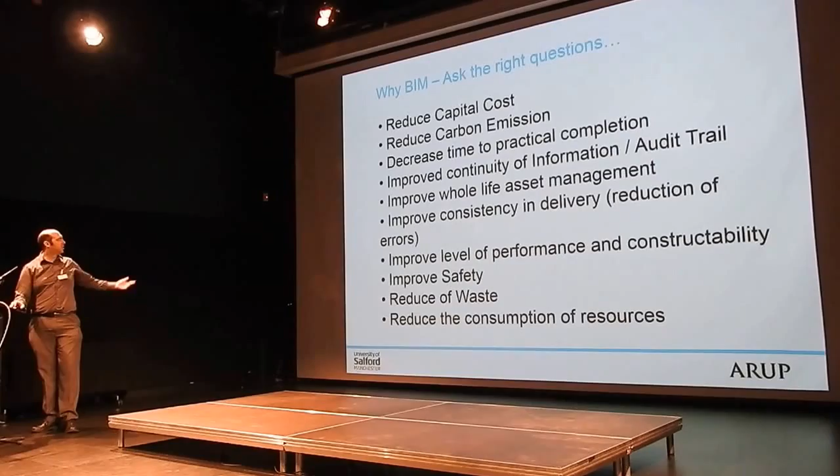So two of the things that are quite key to me, and to most people whether or not they know it, are reduction of waste and reducing the consumption of resources. And the reason for that is this photograph.

This is the most iconic photograph I think ever taken by a human being, although it's interesting that it was taken last century, not this century. This is Earthrise from Apollo, and I'm the second speaker to mention Apollo today. But look at it - wow, one blue marble floating through space, that's our life support system.

Yet we consume resources at an incredible rate, way beyond what the Earth can actually sustain, and we continue to do so. That's going to come back to bite us, and that could be a potential black swan that arises within the next century.

So yeah, we continue consuming resources, we're going to treble the current consumption of resource. And there's a lot of waste, and that's the thing that really annoys me - that in the construction industry there's a phenomenal amount of waste generated.

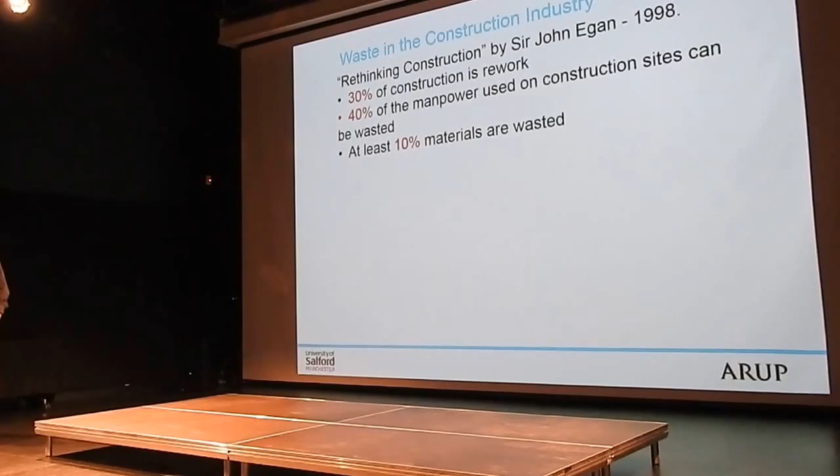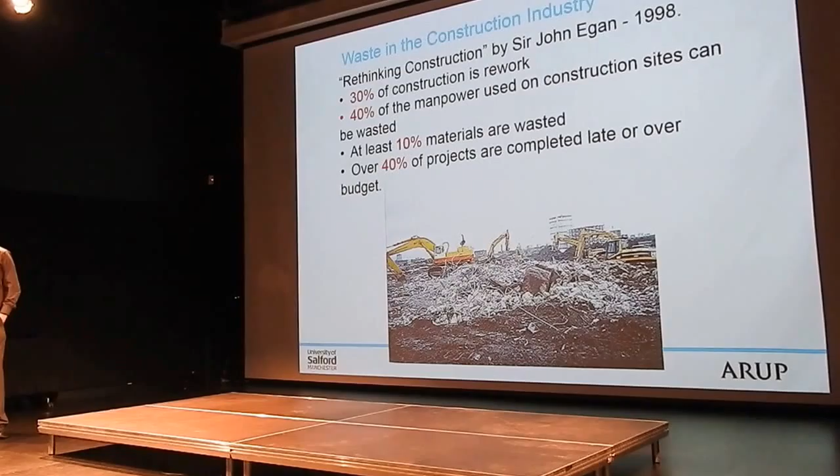Going back, John Egan almost 20 years ago wrote the report 'Rethinking Construction,' talking about 30% construction rework, 40% manpower wasted, 10% of materials, 40% late or over budget. In 2009, there was a report called the Wolstenholme Report, 'Never Waste a Good Crisis,' and that said things haven't really changed, to be honest, except for the projects that took on board lean principles from rethinking construction excellence, where there had been a dramatic improvement. But for the most part, things in the construction industry haven't changed.

NIST wrote a report called 'Cost of Inadequate Interoperability in the US Capital Facilities.' Bit of a mouthful, but they reckon $15.8 billion are wasted every year just through people duplicating the same task again and again between different projects.

Usually in an audience, when I'm talking and I've got architects in an audience - are there any architects in the audience actually? One or two, right? So the classic example is, how many times do you draw the structural engineer's columns in your drawings? And the response is, yeah, pretty much most of the time. Actually, it's duplication. That's just a classic example of duplication, and it happens all the way through the industry and all the way through the different processes.

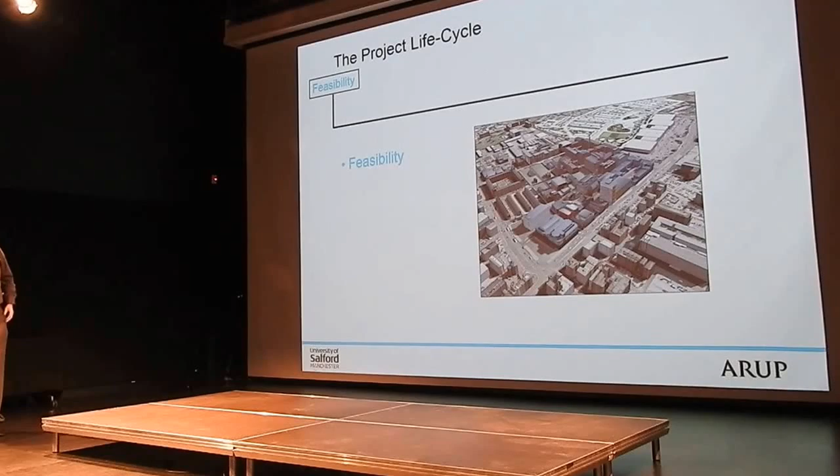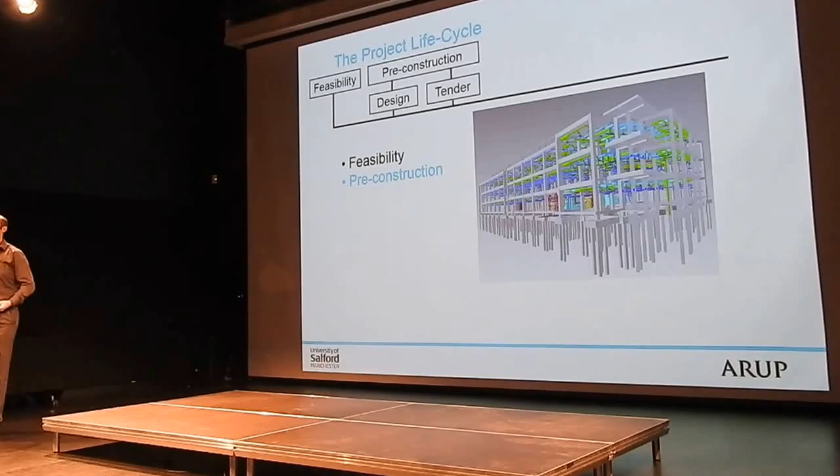So we look at a project life cycle - Freudian slip there - they all go through the same cycles. It doesn't matter whether it's a building or an infrastructure project. You go through feasibility, pre-construction, construction, operation, decommission. Now the interesting thing for the construction industry, as a rule, which is different from most other manufacturing industries, is that we tend to go through a massive redesign exercise after we've tendered the design and when we bring on the construction team.

Because at that point we've actually got the people on board who are actually going to build the thing, fabricate and decide, and they want to do it in a particular way that suits their process. So there's a phenomenal amount of rebuild and rework just built into the procedures. One of the biggest barriers for BIM and for the construction industry isn't to do with technology, it's actually to do with procurement routes. It's about getting the right people at the right time to ask the right questions with the right information.

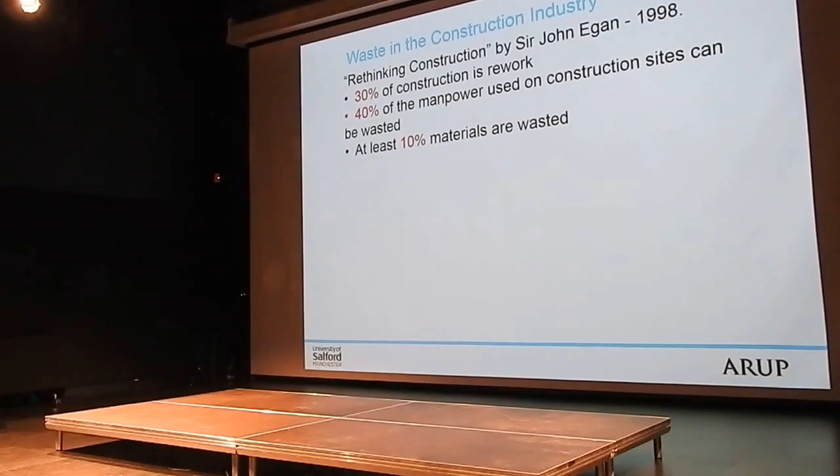Going forward. For some reason. It was so important I did it twice.

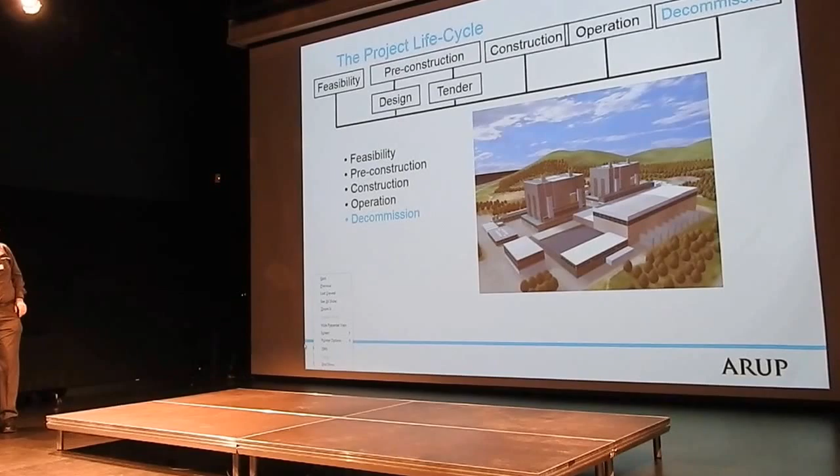Okay, this is the problem, right? Construction industry is... what is going on with that? Oh, construction industry is fragmented. The construction industry is fragmented, and therefore the information transfer between the different groups is broken, and we call this data atrophy.

Data literally dies, information dies as it goes through the process. We start concept, we finish concept, we start again for design. We only ever hand over 50% of the information from design that's in our heads as designers onto the guys who are actually going to build it. They then pass over less than half of that information to the guys actually going to operate the building for the rest of its lifetime.

And typically that used to be in the format of lever arch files, whose only purpose in life was to prop open a door on a hot day. Now we give them a DVD. Unfortunately a DVD is even less useful than a lever arch file because you can't prop open a door with a DVD. So there's something broken in the way in which we perceive and transfer information as we go through the process.

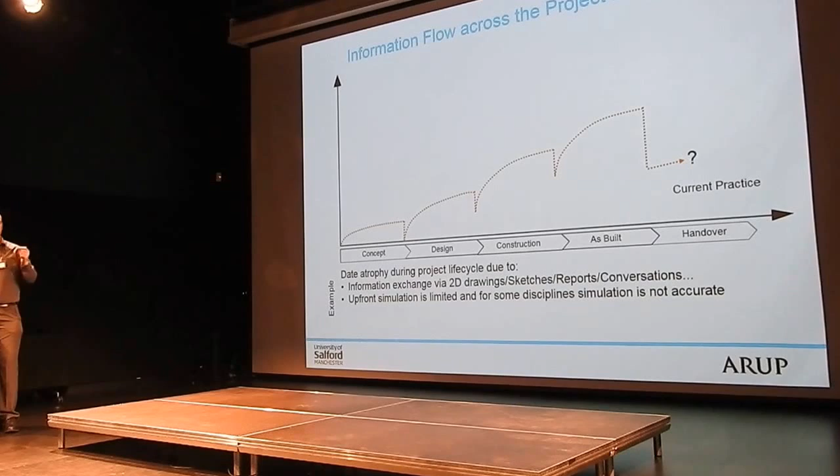There's a whole reason for this, about the way we transfer information, about the way we create information, about the way we don't invest in simulations compared to the automotive industry, which only do a crash test now almost like a final tick in the box. They know exactly how that crash test is going to perform for the safety standards because they've got enough knowledge on simulation. And then we start this final production phase before the design's even complete.

So this is one of the results of this. We have a major amount of resource invested somewhere between detailed design and construction, where actually we can't make as much change, we can not influence change, and it costs a lot of money to change.

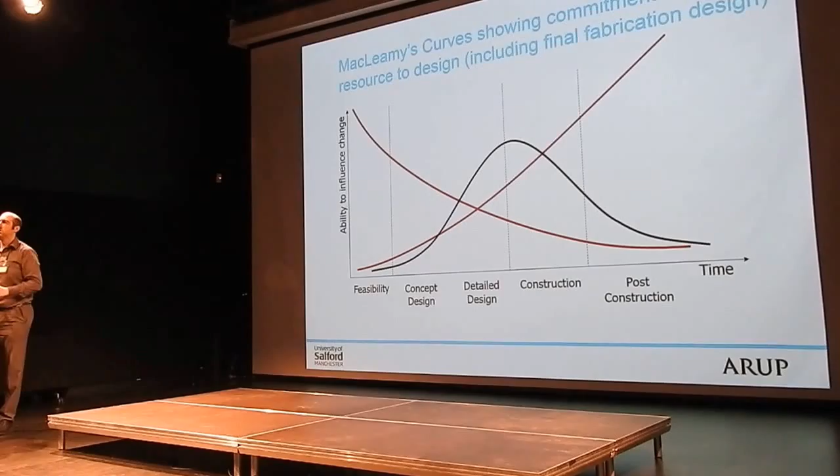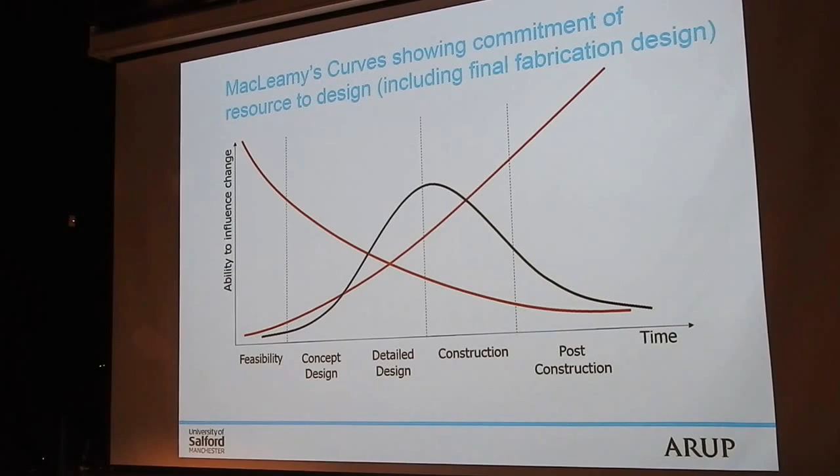Again, if you're doing a tunnel alignment for a Crossrail, for example, at the design stage, if you need to move that tunnel a couple of meters to the left or a couple of meters to the right, they're easy to do—a couple of mouse clicks and it's done at the concept level. You get through to construction, you can't do that. You're locked into it. So we've got to move where we have the resource allocated further to the left, where they can have the greatest influence and it costs the least to change.

And if you notice, actually, what's happened at the bottom of that screen, I've started using different language to do that. I started, again, taking from Derek's presentation, using a manufacturing mindset. I'm talking about concurrent fabrication and design for manufacturing, and then the final process isn't becoming a construction process, it's becoming an assembly process. And this is where we need to get to.

So the answer is BIM. Great, fantastic, we know that. So what is BIM? Well, BIM is a really interesting thing, especially when I'm talking to an infrastructure audience, because everybody says, well, BIM, it's building information modeling, it's not relevant to infrastructure, is it?

Let's get rid of 'building.' Let's not think about a building as a noun, let's think about building as a verb, let's think about the built environment. What we're actually talking about is assets, assets within the built environment. So let's look at the other end: modeling.

The problem with modeling is most people, helped by a lot of software vendors, think about modeling as being something that is a three-dimensional model. It is a model. But actually, stop thinking about it as being a three-dimensional CAD model, and start thinking of it like a scientific model or a financial model—a way of understanding how something behaves.

And actually, let's not even think about modeling. What we're talking about is management—the management of information. So if we had our time again, we wouldn't be calling it BIM, we'd be calling it Asset Information Management, which, considering there's only three words in the acronym, we managed to get two of them wrong.

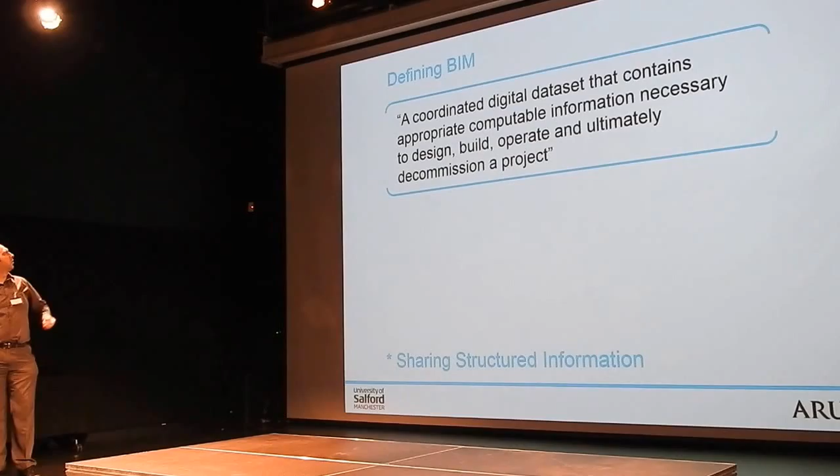If you look at the definition of BIM, a coordinated digital data set that contains computable information necessary to design, build, operate, and ultimately decommission a project, or what PAS 1192 talks about, a process of designing, constructing, or operating a building or infrastructure asset using electronic object-oriented information, we're talking about process.

We're talking about sharing structured information. And if you take one thing from this for the rest of the day, BIM is about sharing structured information. It's not enough just to share information, but you've got to structure that information in a way that somebody else can use for doing their process, and therefore eliminate duplication.

So BIM is like a subset, or coming together, of geometric and technical simulations. Geometric simulations are absolutely fundamental, we'll never get away from that. We're 3-dimensional creatures living in a 3-dimensional world, we need geometric prototypes. But it's also about project information and about ICT, being able to communicate the information, being able to store it.

Know with confidence that when you get that information, you've got the latest information and you're making decisions based on the most up-to-date information. This is what BIM is, bringing all of these things together, making sure that the right people can make the right decisions at the right time with the right information.

So, I usually ask this question just to reinforce a point. Basically, on what I've said so far, should you think that A, BIM is a process that conforms, enhances and strengthens your current businesses by facilitating greater efficiency, or B, a software that you choose to impose on your current business because everyone else is using it?

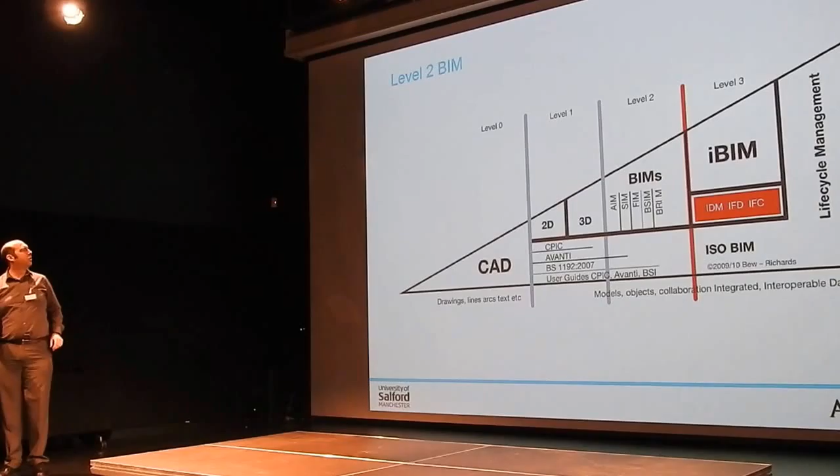It's not the software, and you've seen the Bew diagram. What's interesting about level 2 BIM, which is where we should be going for October this year, is it's preceded by these other levels, level 0 and level 1. So level 1 BIM is basically 2D CAD, but it's 2D CAD done in a particular way.

It's still about sharing structured information, and one of the primary documents for this is BS 1192. BS 1192 gives you information about how to structure information from CAD, talking about layering, talking about naming conventions. And that's really important. You can't move on to level 2 before we've actually understood the basics of sharing information, how you provide layers between different companies so people can actually use the same information without duplicating.

And then we go on to level 2. So level 2, there's 8 documents, or 8 pillars, we call them, of BIM. The first 4 are extensions of that first document, 1192. Some of them are PAS standards, one of them is actually a real British standard, and they deliver information on capital facilities, the delivery, information management for the operational phase, information exchange requirements.

Which is how to structure COBie, how to deal with the security of information. So they're all documents that help you with sharing and structuring information for the purpose of sharing that information with others.

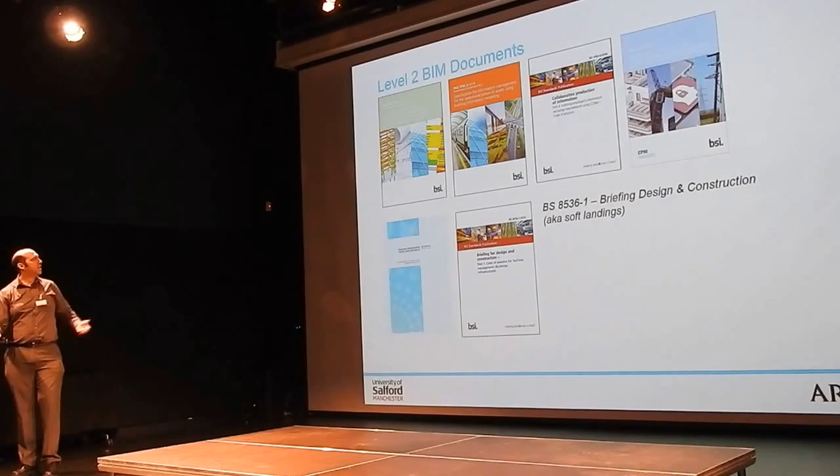That's a really important lead in moving forward on how we think about working together and collaborating. There's another document about soft landings, about briefing. Then we've got a classification system, for example, Uniclass 2015. And recently we've got the digital plan of works. All of those documents together, that is BIM Level 2. And that is where we should be in the process of understanding all of these for the delivery of government centrally procured projects by October of this year.

And then you look at that and you think, actually, the industry's got quite a long way to go in a couple of months. This is potentially black swan moments, moments where people find that actually they're no longer able to bid on centrally procured projects because they're not able to demonstrate that they can work in a BIM-enabled way. And there's a long way to go.

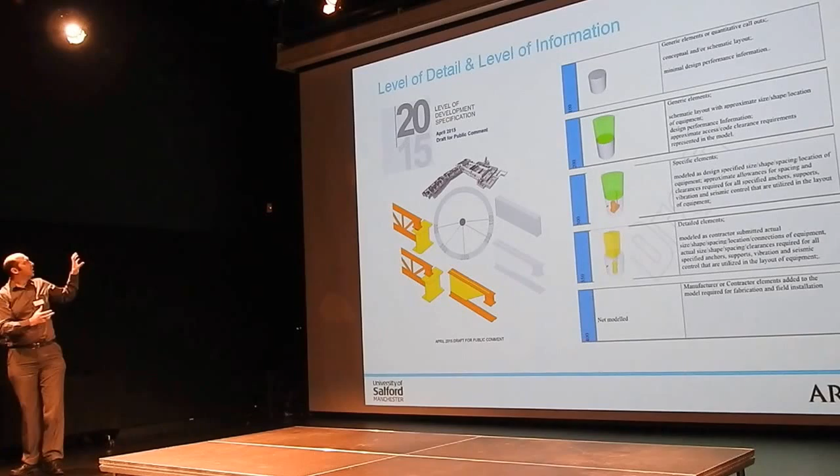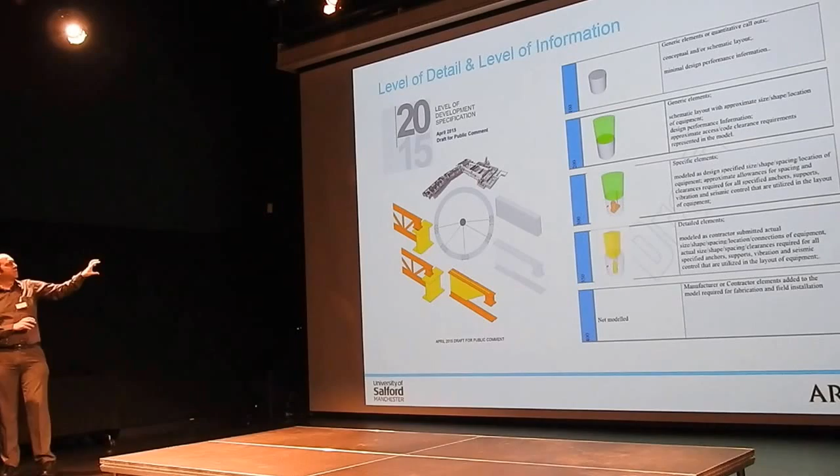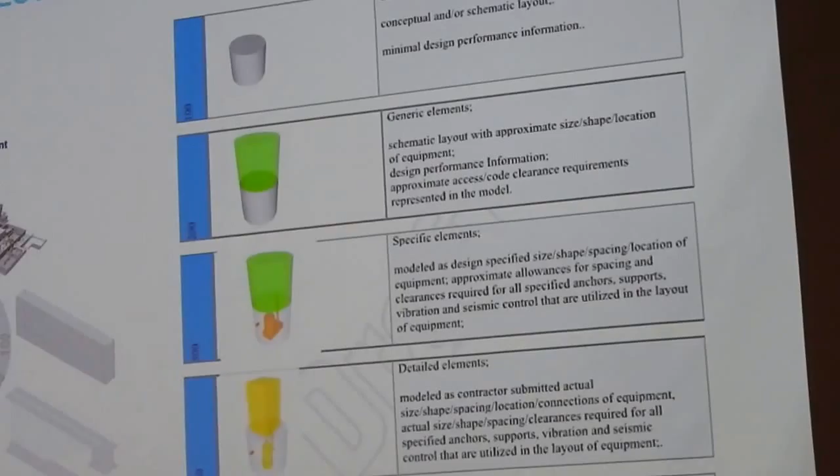Just before I talk about a real project, the last thing I want to talk about is this idea of level of detail and level of information, because this is another important thing within the framework of BIM objects. Level of information and level of detail is being handled by this digital plan of works. Now, level of detail for building projects is actually quite well defined, and we use an American Institute of Architects document, the AIA document. For infrastructure projects, there is not that body of work out there about helping define at which stage and how developed objects should be for an infrastructure project. So there's quite a bit of work to do on developing the same level of granularity and making sure that people can understand.

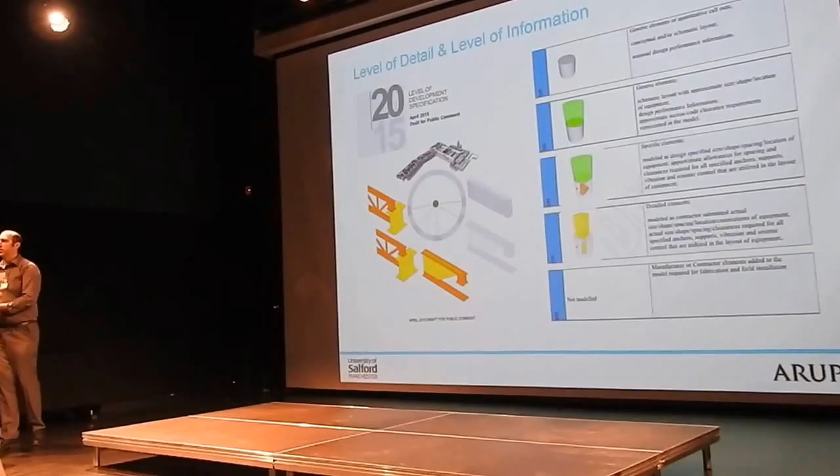And eventually this comes back to scope of works. It comes back to what are you being contracted to deliver at a particular point for the client in terms of the structure of information.

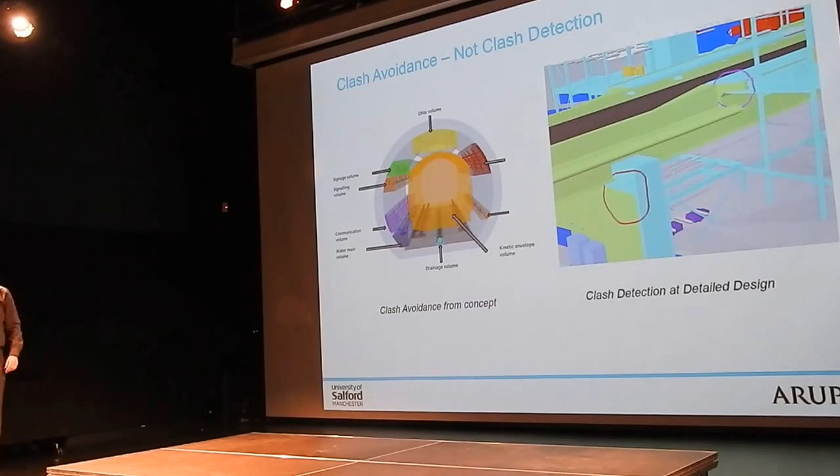Eventually, hopefully, the idea is that we're going to move from this idea of clash detection. Everybody talks about clash detection, but actually the key we should be talking about is clash avoidance. So this is an example, taken out of PAS 1192. We talk about, right at the start, in terms of concept, about volumes, making sure that there's volumes in models. If you're a package designer working within the overhead line electrification volumes, and you stray out of that package, you know there's potential that there's going to be a clash somewhere. Stay within that for your package, and you know there's a chance you're not going to end up later in the detailed design doing clash detection and finding clashes. So we need to get into the mindset of trying to avoid clashes as we go through the project, right from the start all the way through.

So I'm very quickly just going to talk about a real project now, which is Crossrail, a project that Arup was involved with, on multiple sides. We also had staff seconded into Crossrail to help set up the information management.

Crossrail is an amazing project, a massive tunnelling project through London: 28 surface station upgrades, 8 major subsurface stations, 90 kilometres of network, 21 kilometres of twin-bore tunnels. A massive project. And it's been a success largely through the adoption of information management processes to help manage the amount of detail that we've got to do.

The purpose of Crossrail was to increase London's below-surface rail capacity by 10%, provide massive, significant regeneration opportunities along its route, act as a catalyst for growth, and provide high-capacity links from Heathrow to London's West End, Canary Wharf and the east of London.

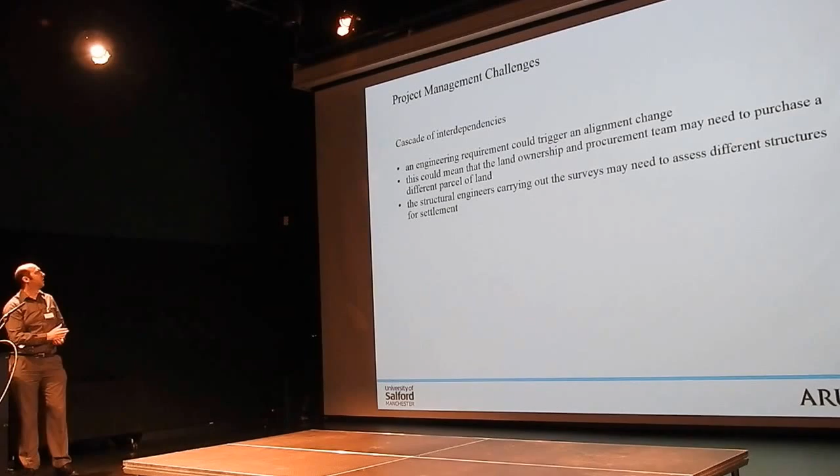But what did it actually mean in terms of the cascade of project management? Think about this example. An engineering requirement triggers an alignment change of the tunnel alignment. This then means the land ownership changes, the requirements for understanding the land ownership for that tunnel changes as a result. You may need to buy a different parcel of land. It means structural engineers then have to go and survey all the new buildings on that alignment, and transport and logistics teams need to find different accesses to that site. And that's just triggered by that alignment change.

So in order to do this, we've got to bring together lots of different things: computer-aided design, BIM-enabled tool sets, BIM authoring packages, GIS systems, geographical information systems, and project information management — and it looks something like that on the right. We've got all of these different people contributing information, taking information, contributing information all the time over this massive infrastructure project.

So what we want to do is move towards the creation of virtual assets. This is a different mindset moving forward with BIM. Clients need to think about procuring digital assets, not just physical assets anymore. They're going to procure digital assets.

We've got to set some processes, integrate all the design, construction and operational life cycles within this virtual environment, and collaborate between all the different parties. Ultimately what we want to get to is this concept of a single source of the truth, which has got all of the information so people can make the right decisions at the right time with the right information.

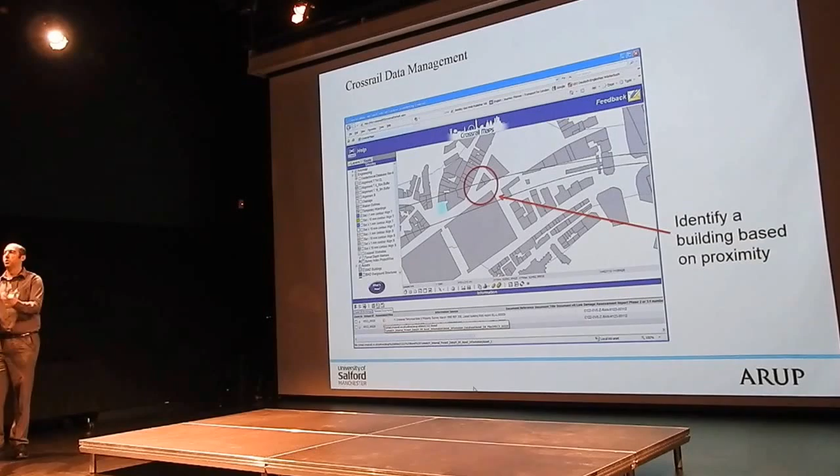Remember when I was talking before about changing the alignment - these dark lines you see on the graph represent the tunnel lines and settlement lines, and we've identified there is a building within that. Using the GIS system, we're able to pull out information about that building - photographic information, who owns it, any surveys or ownership correspondence. Everything related to that building can be pulled up from this database by cross-referencing using the GIS system.

It's basically just a means of accessing data so people can make decisions with the right information. This used a browser, so it wasn't a bespoke piece of software. It was designed to run within a browser, so you didn't need to install anything on your computer - you could just use a browser to access this information.

The types of tools integrated into Crossrail included 2D and 3D CAD, GIS, visualizations, data management, office applications for calculation and communication, specialist software for settlement analysis, data document management systems, and engineering content management systems. All of that information was pulled together on the system with an idea of enhancing processes based on BS 1192 principles, collaboration, and this concept of a single source of truth.

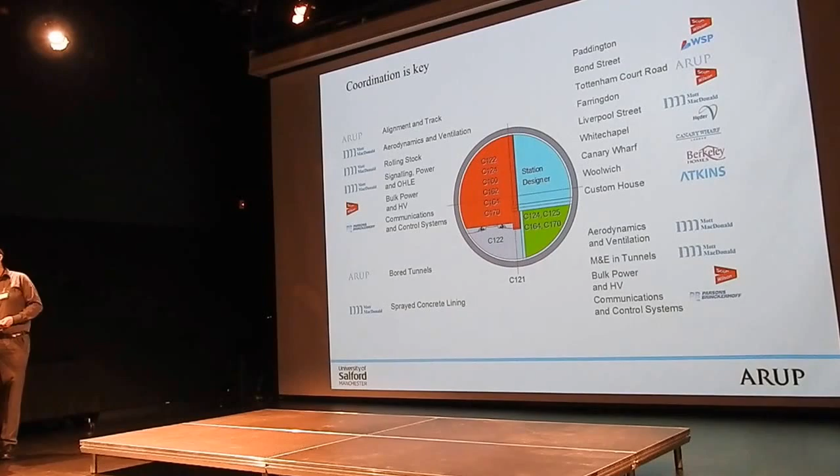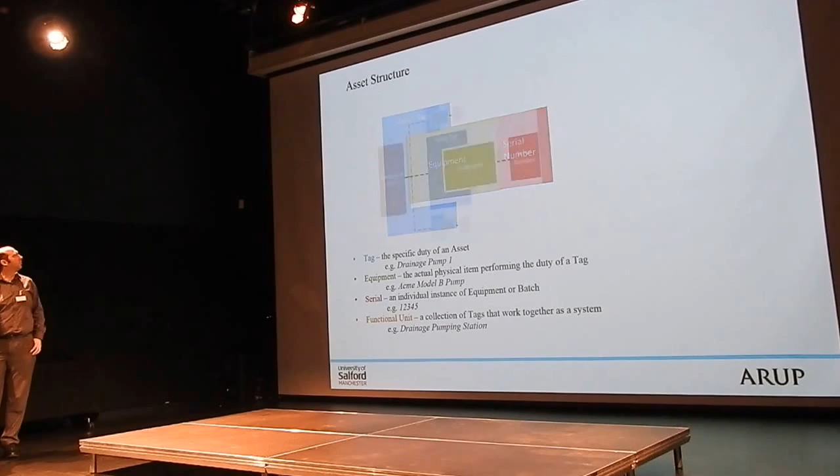I feel like I'm running out of time - okay, sorry about that. I'm going to quickly skip through these slides; they'll be available for you to look through, but I want to get to one final slide. This is talking about asset management and how asset management was delivered for it.

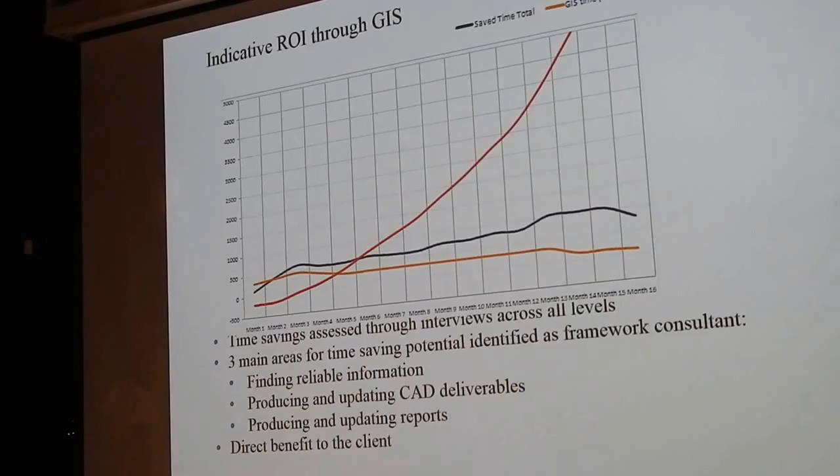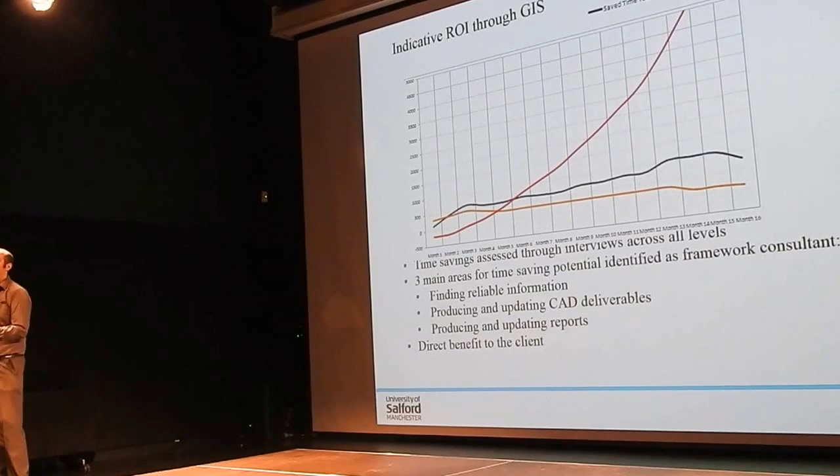The orange line beneath it is the time it took to do the task once we implemented this database system to cross-reference GIS information. So each time there's a request for information, there's a saving, and the client makes money because of that saving - and that's just direct cost, not indirect cost from making the wrong decision at the wrong time.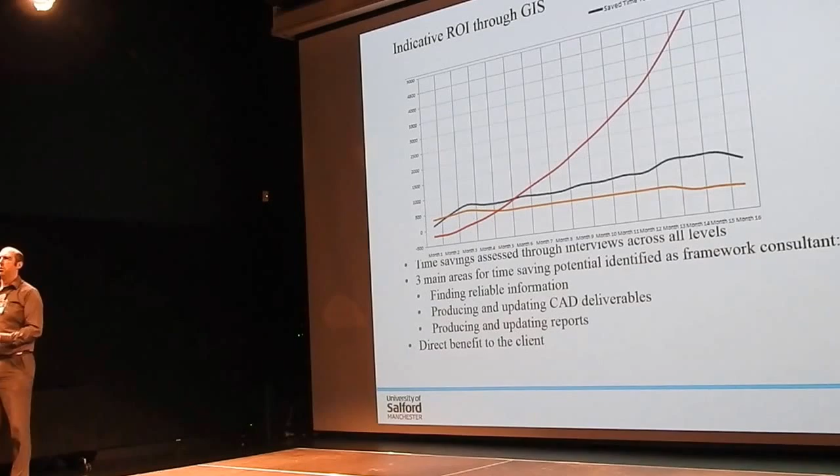And the red line going up is the return on investment. It's negative to begin with because you've got to invest in the system, set it up, and train people to use it. But pretty quickly you're into the process where every time somebody makes a request for information, you're making a saving - and that return on investment is continuous throughout the whole process.

And this is the power of putting in place and thinking about information-centric processes, having information and sharing structured information right at the heart of the process. You very quickly get your return on investment back, and you make gains for the client, on behalf of the teams who are working for it.

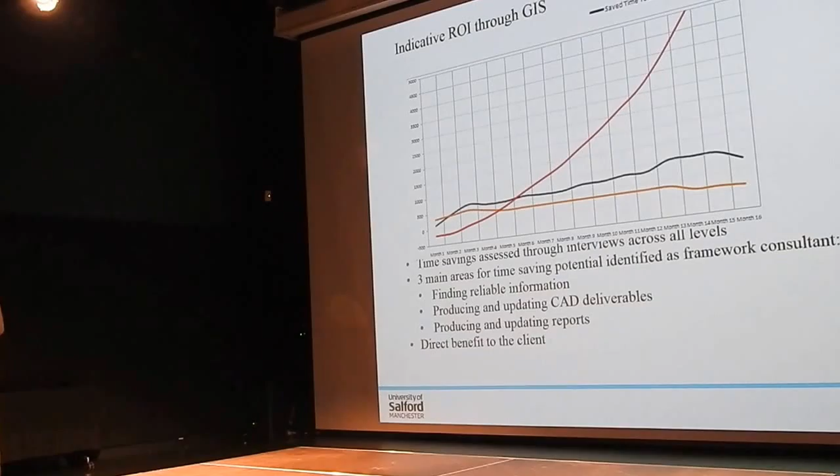Beyond building, how can we integrate, or what's the rationale of using BIM with GIS and other tools? The examples Martin just gave us are actually very good examples of integrated use of BIM with GIS, based on the level 2 BIM protocol standards in the UK, which are actually for the building sector, but are being implemented for highway and infrastructure projects. This means practice, experience and lessons learned will build up over time, and possibly BIM protocols for infrastructure projects can also be produced in the near future. That's very useful, and gives us good understanding about using BIM with other technologies such as GIS for infrastructure projects.

Now I'd like to invite Paul Bryan from Historic England to do his presentation. It's a new institution, and he'll give us a presentation about BIM and heritage. Are they a good match? He'll also touch upon some of the technologies they use, or think we have to use, in historic environment management. Yes, Paul.

Back from your coffee, so I'll try and skip through this fairly quickly because I need a cup of coffee myself.

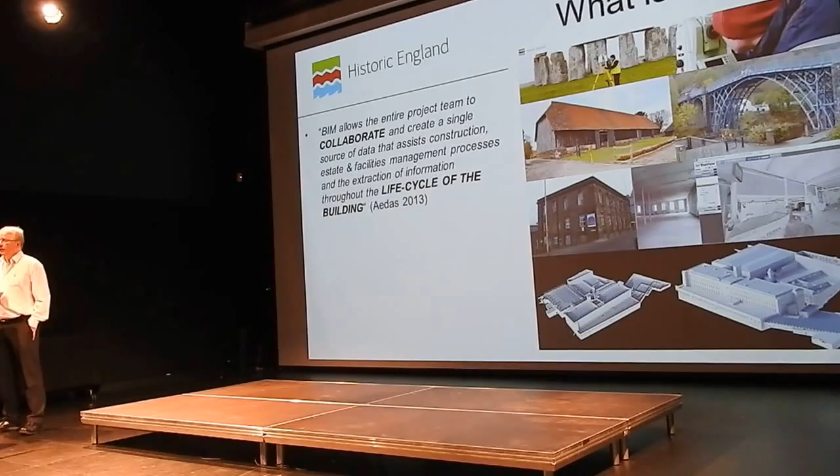If you put your own views on BIM to one side, it is about collaboration, the sharing of data, and the idea that once created, it's not put on the shelf — it's meant to help maintain the building whilst it's there. It's also a process of illustration in digital terms of all the elements that compose a building. It was very interesting listening to John's talk — he asked if he was alone in his views. I think you'll find I'm with him in terms of the views he put across.

Apologies that my slides seem to be getting cut off by this projector, but those of you who know David Philp will probably recognise that. It's not a matter of if, but when your firm will implement BIM. You might want to ask that question of Historic England over coffee — are we implementing it? I'll give you a fairly straightforward response.

We've heard a little bit about the BIM Building Information Modelling Task Group, but John also mentioned the BIM for Conservation, or BIM 4C, working group that was established in 2014, following on from the pioneering work that John mentioned already. The idea is to raise awareness and understanding of BIM within the conservation and heritage sector of the built environment.

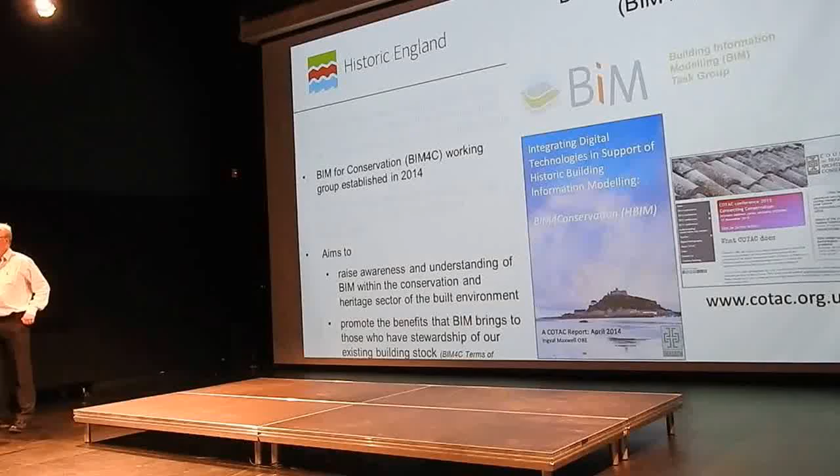Even though we've heard various acronyms already, I'm putting together new ones on the fly, like historic environment BIM or built environment BIM. But it's also about promoting the benefits of a BIM approach when maintaining existing buildings.

So what are Historic England and English Heritage doing about BIM, or doing with BIM? Well, I first encountered BIM in 2009 when I attended a conference over in America, and I was the only person in the audience who hadn't heard of BIM before. Everybody else there was talking openly about it.

So I came back to the UK and mentioned it to our senior management. We like to develop special interest groups within our organisation, so a BIM special interest group was formed called BIMSIG. The important thing was that it was a collaboration of different roles and expertise that all feed into a typical heritage project.

You've got the estates managers who manage the buildings, the heritage protection and planning people, archaeologists and architects. You've got remote sensing people like me focusing not just on geometric technologies, but technologies to understand the actual fabric itself. Then you've got conservation and science people, and most importantly archive, because if you're looking to maintain or use this for the life cycle of the building, you've got to think about how that data is going to be stored, managed, used, and made accessible.

Historic England have what used to be called the National Monuments Record down in Swindon, so to us that's the obvious repository for information like this.

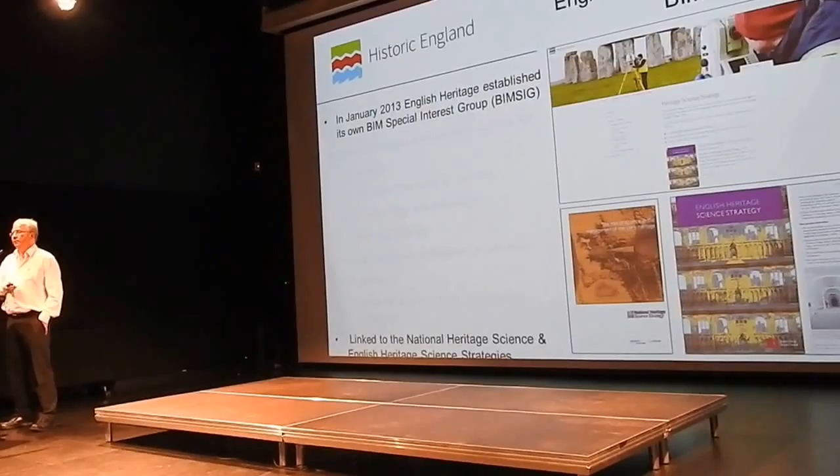However, at the time, English Heritage were actually formulating their own science strategy, linked to the National Heritage Science Strategy being promoted by the government. So one of the things I was able to do was get BIM included within the Heritage Science Strategy, because once that was in there, people could see how it worked alongside all the different heritage science approaches typically used.

So the BIM SIG that we created aims to assess the relevance of using BIM processes across English Heritage's own estate. You can see a very simple diagram of all the different properties. But one I want to focus on is maybe one you haven't heard of before - Harmondsworth Barn, which is on the northern side of Heathrow Airport.

A very important and significant historic building, 15th century - the largest intact medieval timber frame barn. You can see why it's been called a cathedral of Middlesex because of the fantastic interior space.

However, as a heritage building, it has suffered over the years. It was in private ownership previously, struggled to maintain it as a typical building would need, so it came with a load of structural and conservation problems.

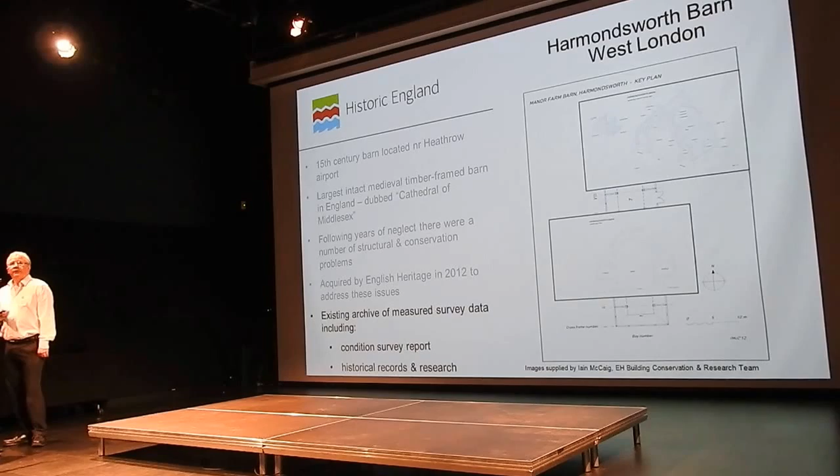English Heritage stepped in 2012 and acquired it, and the idea was to address these issues, but it came with a body of information that had already been collated. I suppose within the BIM terminologies, this might be BIM level 0, touching on BIM level 1 sort of data.

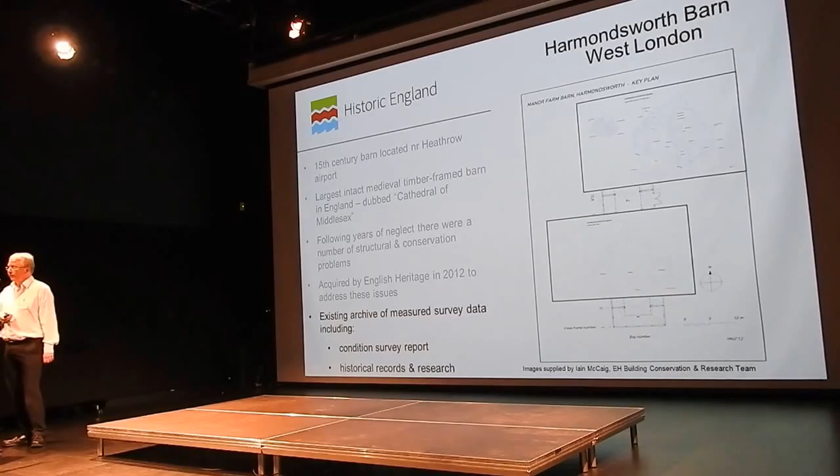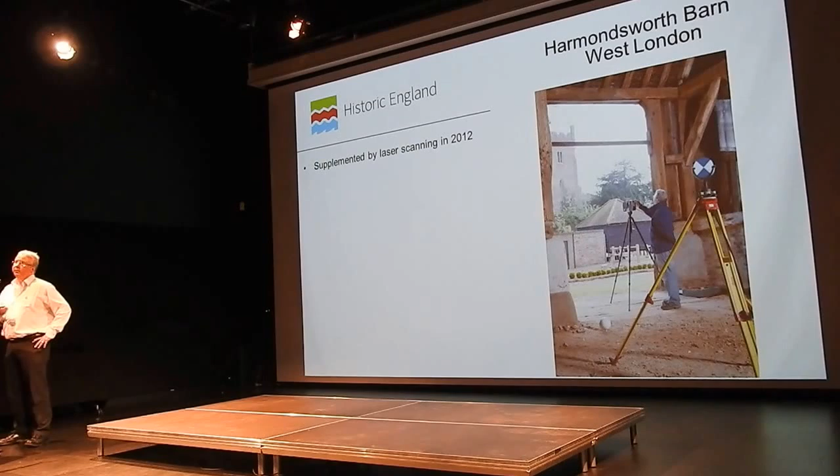In 2012, English Heritage acquired its first laser scanner, so I managed to get the project managers to agree for us to supplement this existing information with three-dimensional data created from laser scanning. From that, a whole series of outputs were generated that would help the conservation project, and this data has already been used by the engineers, the region have to maintain the building, and the organisation itself.

You can see some of the outputs that have been created from them. We've also used it for educational approaches through an organisation called CyArk, which was founded by Ben Kacyra.

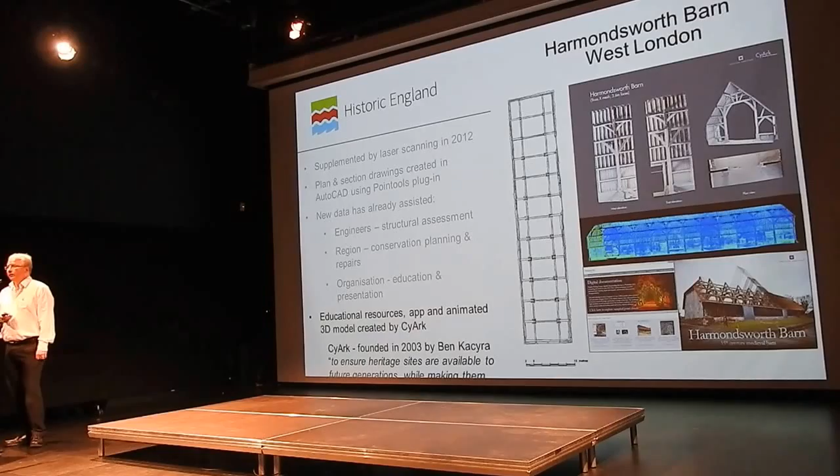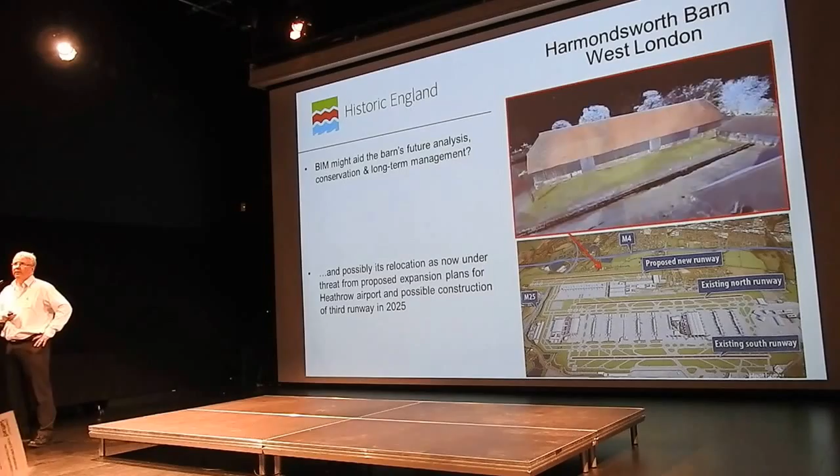But for a site like Harmondsworth Barn, that's potentially under threat by what might be happening at Heathrow Airport over the next 10 years or so, we have a body of information that would help us maintain it up until 2025 if it goes ahead, or even use it to relocate the building if it needed to go there.

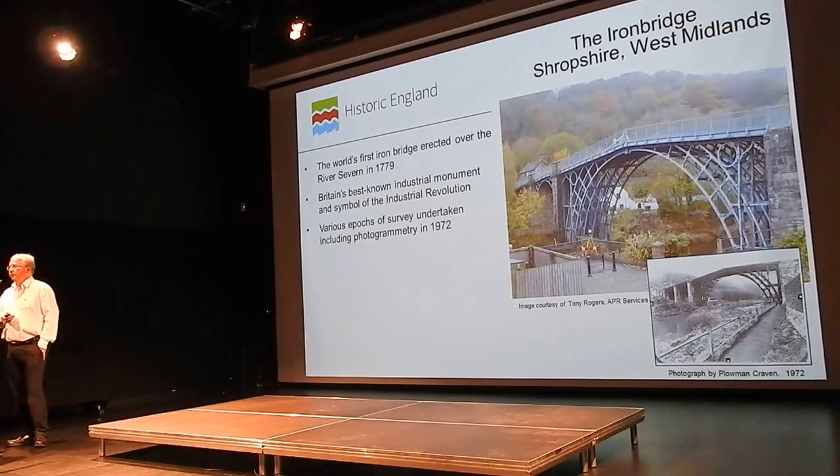The other sort of monument I want to throw into the equation, which is not your typical existing building or structure when you think of BIM, is Iron Bridge. I'd say most people have heard of Iron Bridge and its iconic status as a World Heritage Site. Various epochs of survey have been undertaken, probably at level 0, potentially level 1 type of BIM data, so we've got that information already.

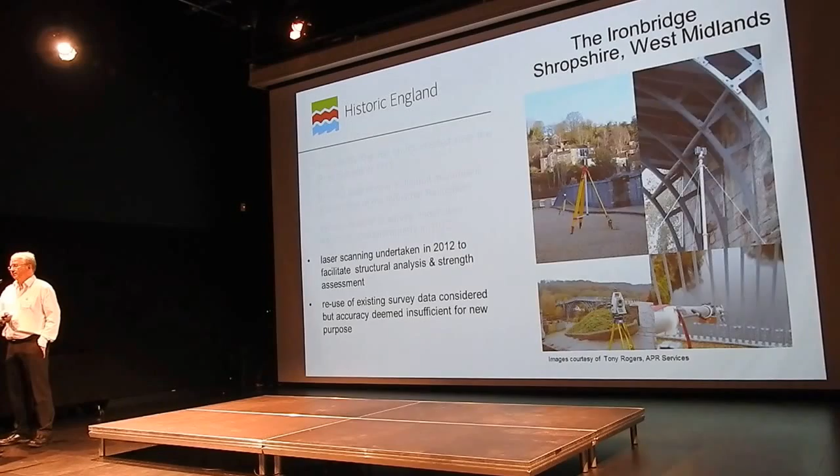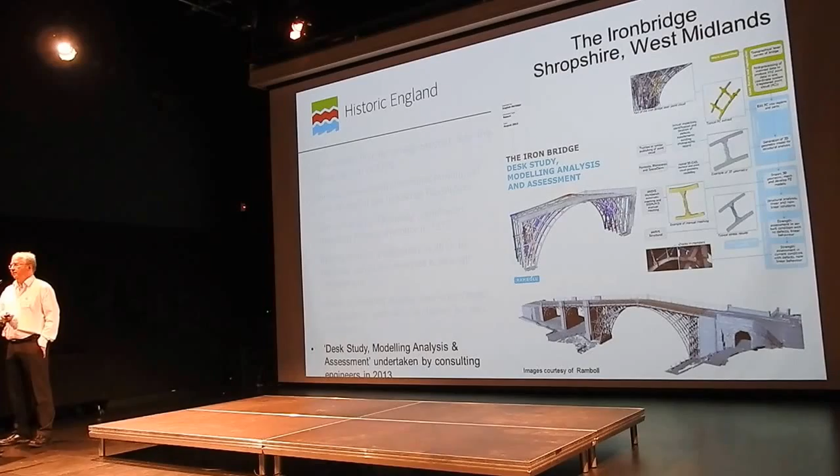But a need to actually assess the structural stability of the building brought in a need to generate new data. This was included in a very detailed report by Ramboll, an engineer, who did a desk study, modelling, analysis and assessment. Within this they created all of the geometric components that could make up a BIM model of Iron Bridge. I'll touch on this in a little while, but it was an opportunity to use existing data and new technology to help manage that structure, as it says in this following slide.

And of course, with laser scanning, you've got the ability to animate the point cloud data - although I must admit that's getting a little bit old hat now, because we're probably into drones and flying drones around a site like that to capture imagery similar to that.

The other area of the work of BIMSIG was English Heritage and now Historic England. They have to deal a lot with the external sector - people are actually coming to English Heritage and Historic England for advice. And of course people pick up on these buzzwords.

Laser scanning was one that we corrected - people were commissioning laser scanning without actually thinking, do you actually need laser scanning? BIM has started to appear as well.

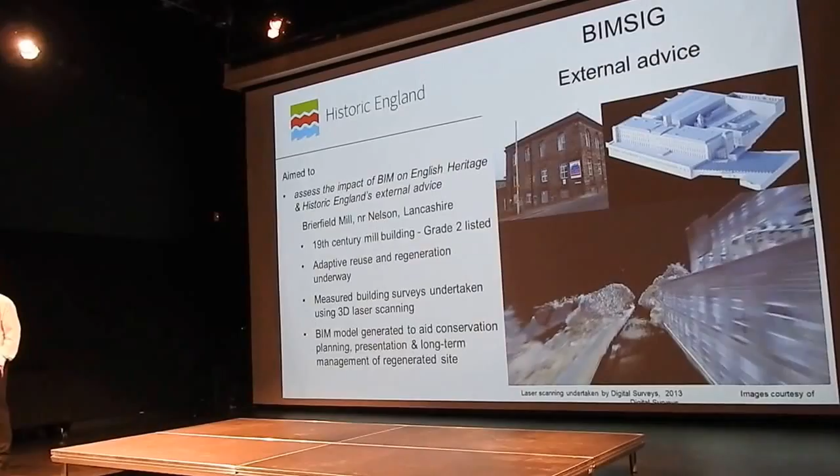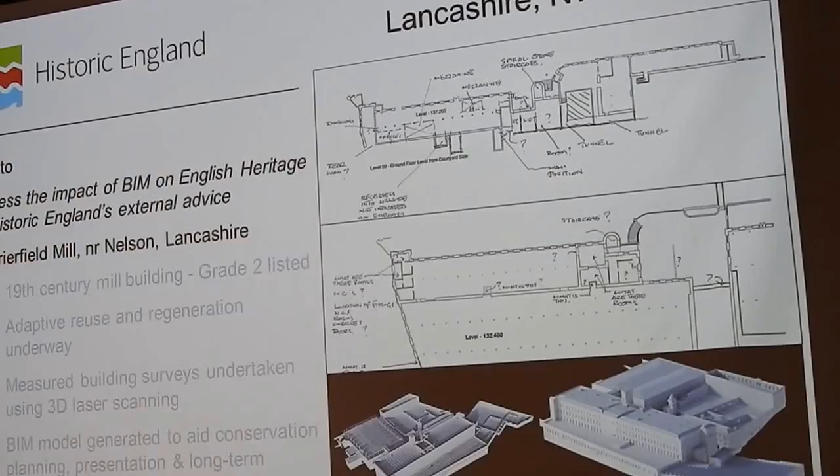So we have projects like this regeneration project in Nelson, Brierfield Mill, a Grade 2 listed mill building. There, the term BIM was brought in very early on by the actual architects who wanted to regenerate the site. It was fully laser scanned, with lots of nice animations, and a BIM model was actually created for the entire site. The only drawback is that you haven't got continuity typically in people using this data - so you had a new body of architects commissioned who obviously didn't like BIM.

And so they started to pull it apart. But if you actually look in detail, part of me is thinking, well, they're actually saying correct things - the data to help within a BIM environment needs to be complete, it needs to have all the architectural information attached to it. So these were things we've had to consider within our work.

The BIM task group has generated various client guides. One of them is about 3D scanning and data capture. And if you're talking about the technologies that feed into the geometric side of BIM, people tend to say laser scanning - and it's quite ironic that the client guide says 3D scanning.

I think John touched on it earlier - do you actually need laser scanning? There are other technologies out there. You've got existing data that you can reuse, existing imagery that you could reuse within photogrammetry. You've now got this term called structure from motion photogrammetry that a lot of people are getting very excited about because it's cheap - you can actually use it pretty much for free using various apps now being generated by the likes of Autodesk. But that's a little bit of an issue for myself - don't just think about laser scanning, think about the actual data that you need for your project.

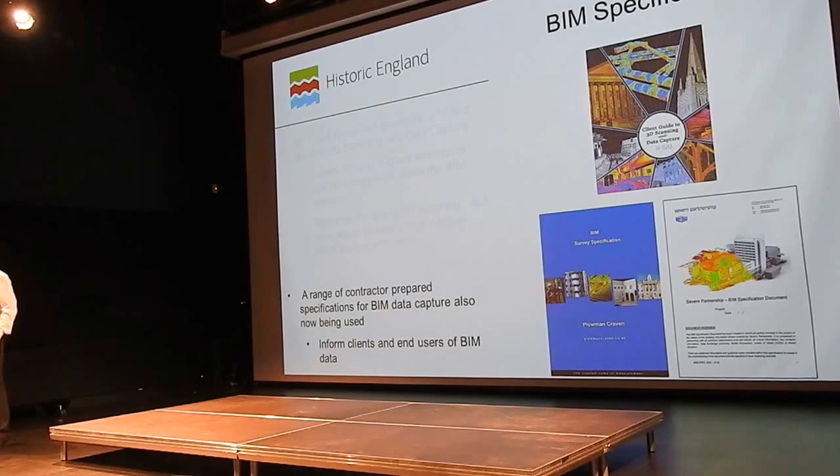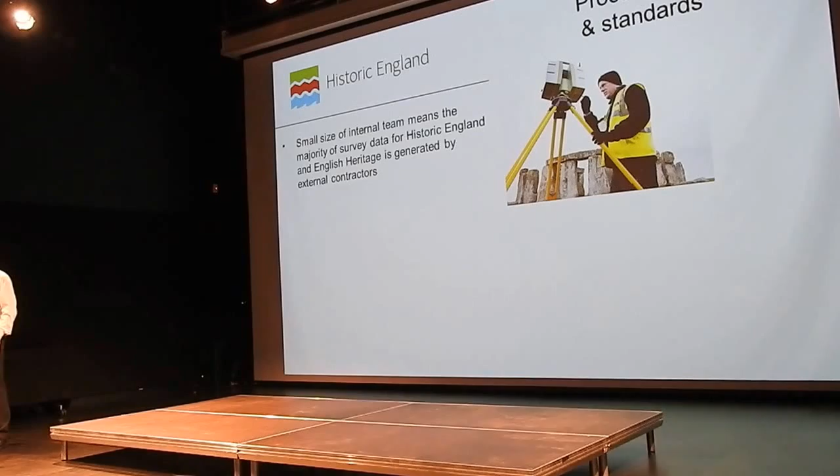We deal a lot with commercial contractors. The majority of the data for English Heritage, survey-wise, is procured externally, and there we're dealing with contractors that have well and truly got onto the BIM bandwagon, setting up BIM teams to make money, as I said earlier. Our team within Historic England is small, so when we commission work to outside companies, we have to tell them what it is that we want. So in terms of procurement and standards, we use a framework agreement for commissioning this work.

And I mentioned low-level aerial photography, typically acquired from drones. There are other ways of getting the camera up into the air, low level, but drones are being picked up very quickly by people.

For anyone who's actually been in Tesco's or WH Smith's, you might see Drone magazine appearing not on the top shelf, but on some of the shelves within the newsagents. There's an article about our use of drones by Historic England in the current edition.

So if anyone's interested in using drones, you might want to look at that later. But as I say, we need to actually tell contractors what we want, and we've been using a specification for a number of years because we want to get the right survey for the right job at the right time.

The actual specification is in a number of editions now. It was originally published in 2003. I wrote the first version. It was revised in 2009. And we've recently revised it to include the widespread use of laser scanning, digital imaging, drones. But we've also included BIM.

We wanted to actually include BIM because BIM shouldn't be seen as a separate entity. It's a process - I think I was one that put my hand up for the process there. So we want that process to work alongside all of the geometrical data generation processes that are used. You can see an example there that's been created by one of the external contractors we use.

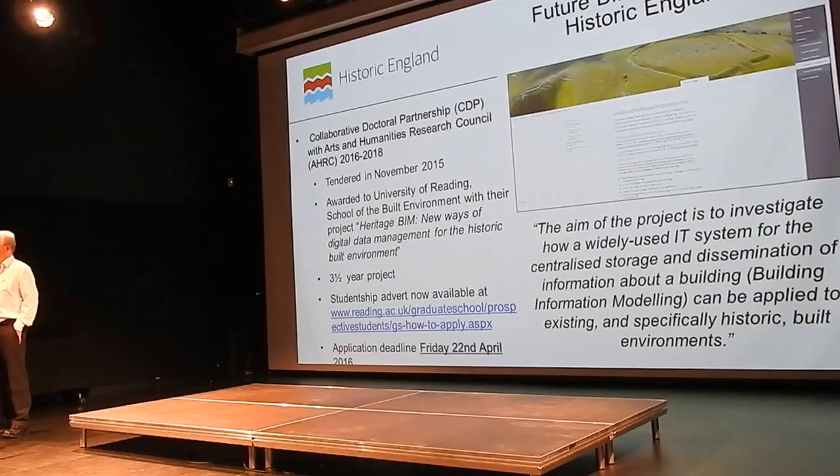The other one is a much shorter process, and it follows on with the heritage science link. This is actually looking at both Harmondsworth and Ironbridge data that we already have, but focusing on the heritage science and conservation aspects. This is a short-term project about to start next month, finishing around November time next year.

As well as generating BIM data sets for both sites, we want to see how those science processes and conservation processes both fit into the BIM workflow, and how people in that area can benefit from them. So, from the title that I said, are they a good match?

Possibly. I think I'm more in favour than against it, because there are definite advantages for using BIM - improved spatial analysis, generating outputs from it, and the visualisation side in particular, which people are very interested in.

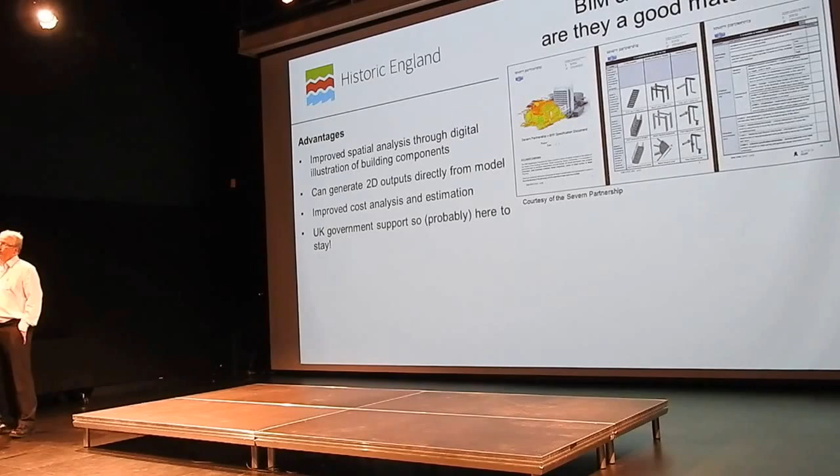Whether we like it or not, the UK government is probably here to stay with it - they keep pushing it, I think. The downside is that some people think BIM is a software, think it is Revit - it obviously isn't, they're just tools to help the process work. But the problem it faces is that it's come from new build design. It's trying to fit what are irregular features you typically find in heritage into a regular box.

So you're trying to squeeze all that detail in and make sense of it. This is where I'm maybe with the likes of John in thinking about not new softwares, but new ways of using the data within those softwares, working with the likes of Autodesk, Bentley, to make those tools fit heritage better.

Architectural depiction takes time to model, and all of this takes a lot of time and money.

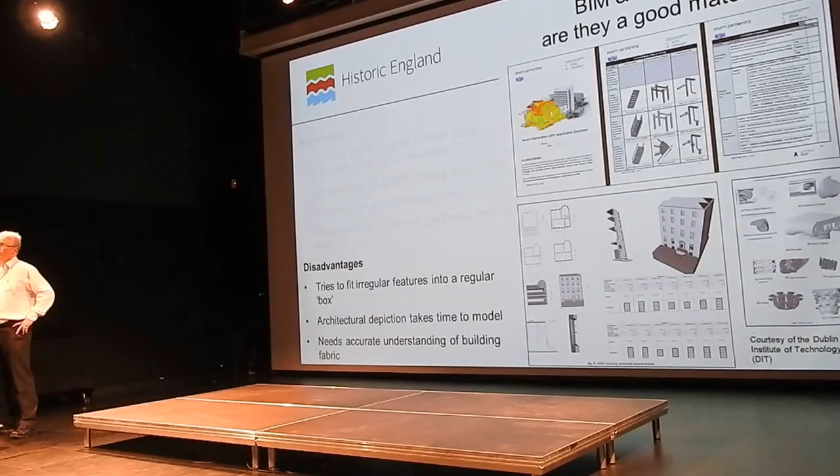So in summary, another acronym to throw in, BIM - is it simply better information management? If you ask English Heritage whether they're using BIM, they'll probably say, well, we're still thinking about it. That's because they already have an information management process in place that gives them a lot of what they need to maintain those buildings. They're considering BIM, but adoption is still low.

I agree entirely with John on that. But if you look beyond the boundaries of the UK, other countries are getting involved in BIM in fairly big ways. So some of our issues are looking beyond our boundaries to see how we can learn from other people. Historic England and English Heritage are still considering BIM and how they might utilise it.

Talked about the irregular features and aspects. And as I say, I think the 'I' word within BIM is probably one of the most important bits, because if you get the information correct, the fabric information correct, it starts to make sense why you're generating BIM. If you want to look at the thermal performance of a building and you've got the information correct, then you're getting valuable data out of it.

And then, at the end of the day, can we afford it? As John said - sorry to keep using your name, John - some organisations probably struggle to maintain the buildings, let alone model them to a higher tolerance. So can the heritage sector actually justify it? I think within certain projects, yes it can. But I think research like we're doing, and collaborative research done throughout universities, is maybe the way forward within all of this.

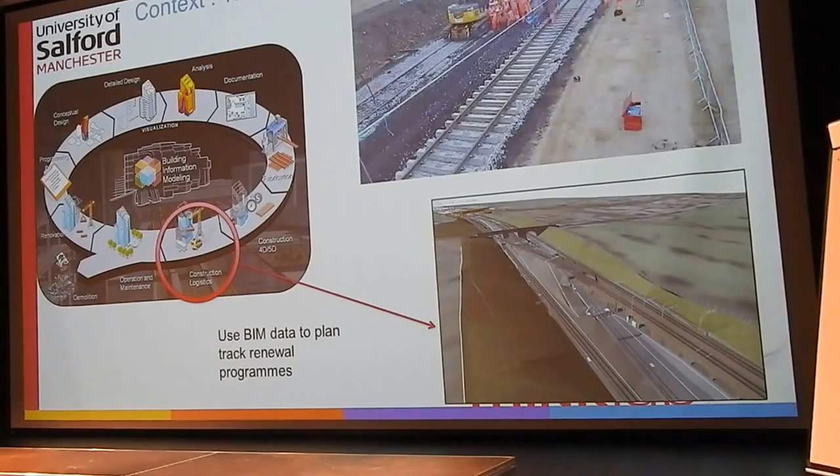Again, when you try to do a project like this, it's going to disrupt the passenger movements and so on. So you need to plan your activities so that at a certain time, certain trains could go past that particular activity - everything has to be somehow moved out of the way. So there also thinking needs to happen within that space.

So let's imagine you're the planner. You need to think about what the site looks like, what sort of activities need to be planned. It's a complex set of engineering activities that you need to think about in time and also in space. And also you're working with a range of groups of people who are planning - the P-Way, OLE, signaling, and so on. You need to build a common understanding about how it's going to work out.

And sometimes, in this particular case, since you are moving and bringing trains between plants and so on, you need to make sure there are no clashes - there's enough space to carry out that particular task. So the space requirements are very important. And also think about - sorry, I've got a problem with my sore throat - exclusion zones, and also access points and so on.

At the same time, within Network Rail, our experience has been you get a schedule done, but it keeps changing until the last minute. So you need to make sure your plan could be interactively changed and adapted, and also eliminate waste, reduce cost, and think about this efficient program.

So when you think about the existing practices that we observe, at Network Rail the planning is done around 2D drawings. Sometimes what you do is use static PowerPoint slides to demonstrate where the track is, how the plant is coming in, then taking the tracks out, for example, and animating it in a kind of 2D fashion.

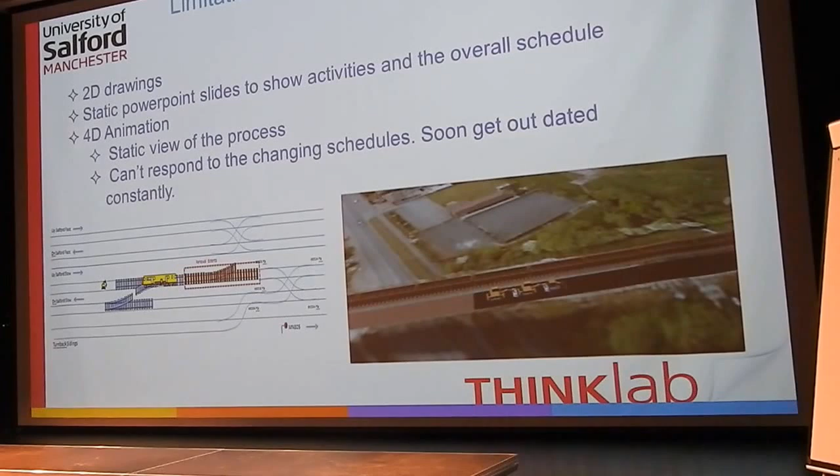The problem with that approach is, as I said before, the schedule is changing very rapidly. So if you've done the animation, the team has to send those changes back to the animation group, which could be a third party, and bring that back again to the planning process. As a result, there's no seamless interaction between the model and the team.

There are also some tools within the construction domain, like Last Planner, and Synchro is another one, where you think about remodeling your particular activities over time. In these cases, most of the time people are looking at Microsoft Project or Primavera and so on, which think very much about time—task and time—but there's no space concept built into that.

Imagine you're a planner planning a task, but it's not really related to where that particular task is happening. With something like Synchro, you bring the model in, then you have to prepare that model—break it down into a set of tasks so that you know that on day one, particular things will be constructed. So you take the BIM model, break it down into a set of steps, and use a complex application interface where you select one and attach that particular task to your project plan.

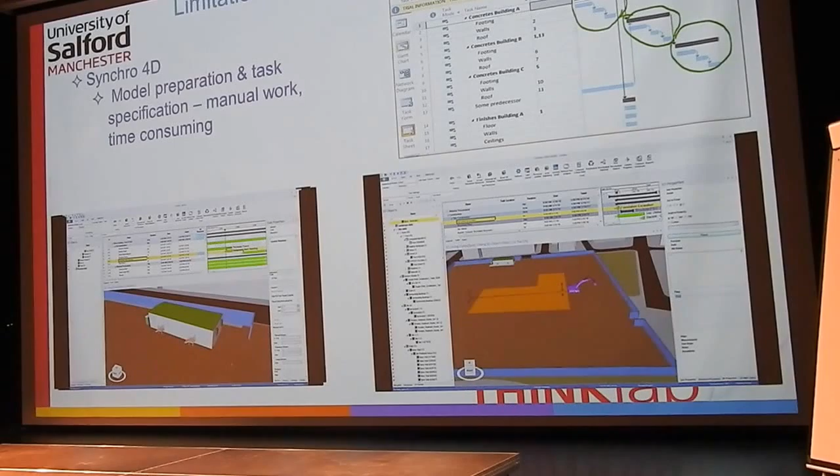So you can begin to manually program how this is going to be constructed. At the same time, for plants, you can use an animation package—you bring in the plant you need and define the animation task. Again, as a planner, you need to think about the planner's thinking model. This particular type of approach demands more of an IT approach, understanding how to manipulate CAD and so on, but for the planner, this is perhaps a bit remote from the way they think.

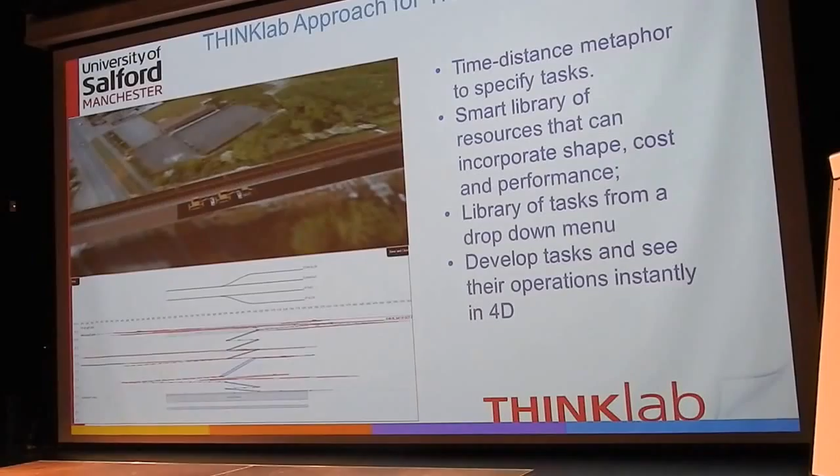So in ThinkLab, what we've done is look at systems with three types of interfaces. At the top is where your site is, so you can bring in GIS data, terrain, aerial photographs and so on, and build your site. Then you bring your BIM model into that, positioning it to set up your virtual site. So as a planner, you've got a virtual site in front of you.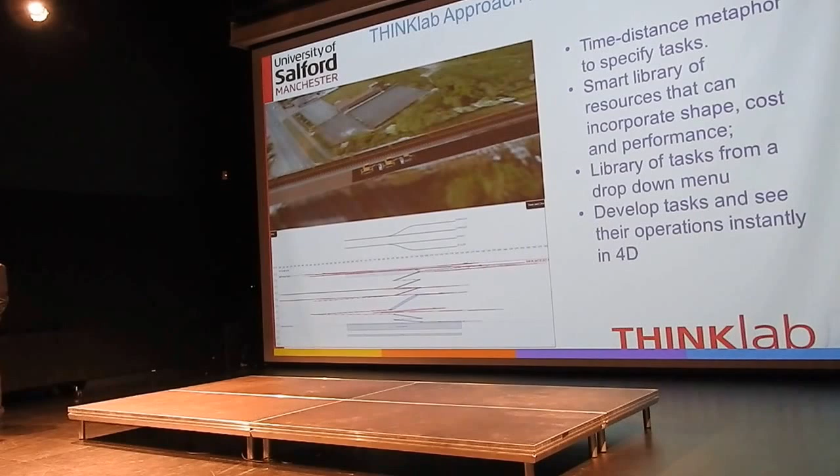Our next task is to think about what the tasks are and what resources you need for a particular task. Here we have something called the time-distance metaphor. On the bottom you have chainage markers that define your position within that terrain, and on the vertical side is time. So you're thinking in terms of time and space—you say, okay, I want a particular plant to go from this chainage marker to over there.

At the same time, you can define a performance for your object—so if you define going from A to B and you know the performance, how fast it can move, the time can be automatically calculated. This bottom pane, for example, allows you to define your task.

The middle pane is like a schematic diagram of your tracks, so you can really see how the tracks are laid out. It's very much a model-based approach, where each plant has a performance cost associated with it, so you can automatically calculate the time and cost for conducting that particular task.

So to reduce the burden on the planner, you have to build some intelligence behind the model—take the BIM model and think about how, once you get the tracks, the logical network connections can be built automatically. Then, for example, if you define that a particular plant should go from A to B, the system will automatically identify the path to get there, allowing you to do path planning automatically.

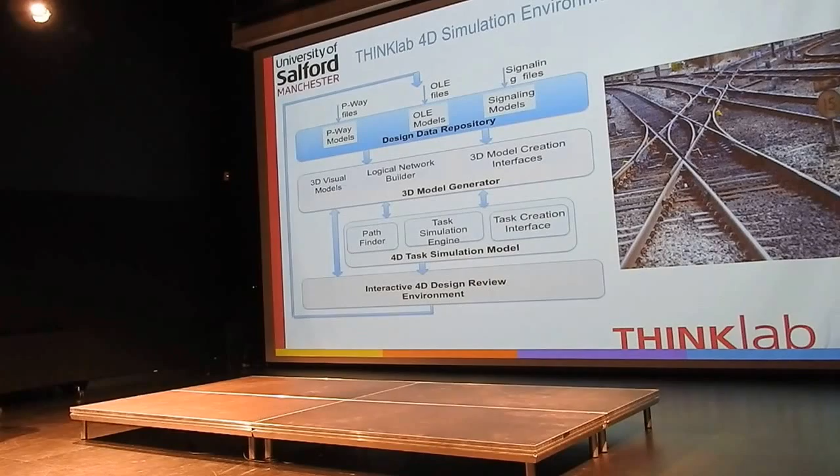At the same time, once you define the task, it will do the task simulation for you to really see—as you plan, you can see on the side those activities happening. Now what I'm going to do is demonstrate this particular system using video.

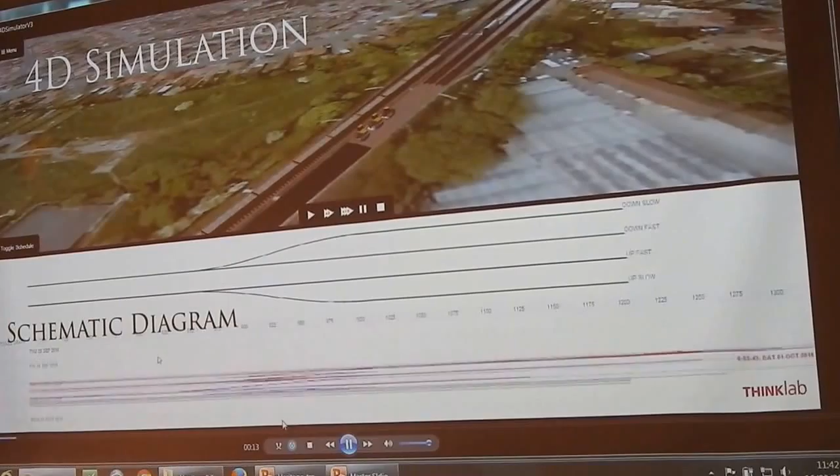So this is our 4D simulation environment. Unfortunately this particular one is a bit slow, so to do a better video presentation. As you can see, at the top this is where the site is, and at the bottom this is where the time distance diagram is. So initially, once you define...

I'll tell you how to do the design in this video. But once you've done the design, it gives you different camera points. You can have a bird's eye view to understand how these are happening. You can be the train driver and really see how that's happening. Or if you are somebody on the site, those views could be manipulated.

At the bottom, this is where the task planner is, where the planner will be thinking in terms of tasks and so on. So again, this is an interactive kind of view.

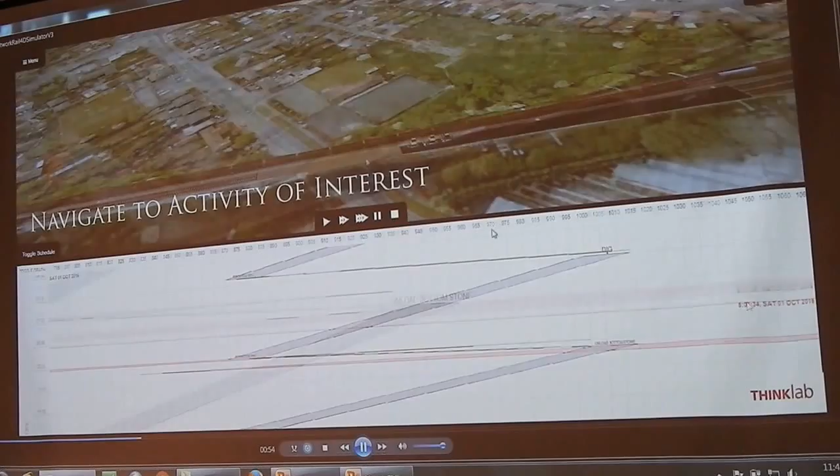In terms of viewpoint, this particular one is trying to show that if you have lots of activities over time, you can zoom into those particular activities and really see what's happening. Obviously this is very slow, so it allows you to accelerate, speed up, and really see how the activities are happening, if there are any clashes, and so on.

So once you've done that, this allows you to define your resources. You can imagine you need different types of trains or something. You define what resources are in your activity. You build up your resources from a resource kind of library.

These are, as I said, intelligent objects which allow you to create the kind of resources you need to apply. Then you can say, okay, I'm going to create a task, and you know what sort of resources you need. Let's imagine you just want to bring the position of your train to a particular point and ask it to go from A to B. So it defines this using a simple approach.

This task again allows you to define different types of representation. So you may say move operations could be red. You can give a color code so that you know these particular tasks are color coded, and you can also attach some information to that.

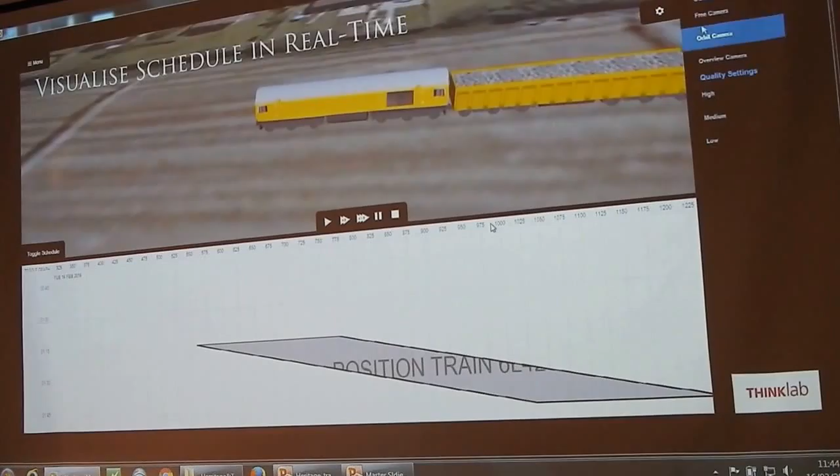Once you've done that particular task, straight away you can see on the side what that task is doing, so you can make sure that it is correctly modeled.

Then what you can do is also define another series of activities and make dependencies. So here's another one, trying to define this. You might want to modify this schedule, bring in another task. In this case, it's taking the rails out.

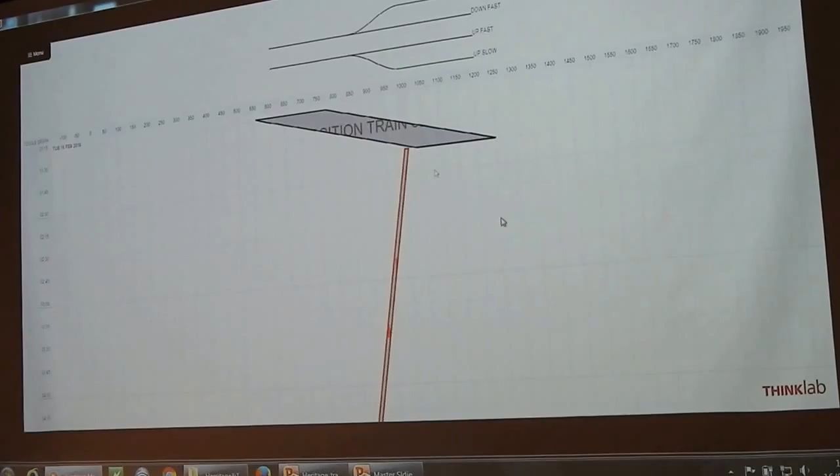So you bring in that particular plant for your task, then you define where it should start from and so on, so that straight away the task is there to say the start should happen at the previous start. So straight away you can imagine that it's happening.

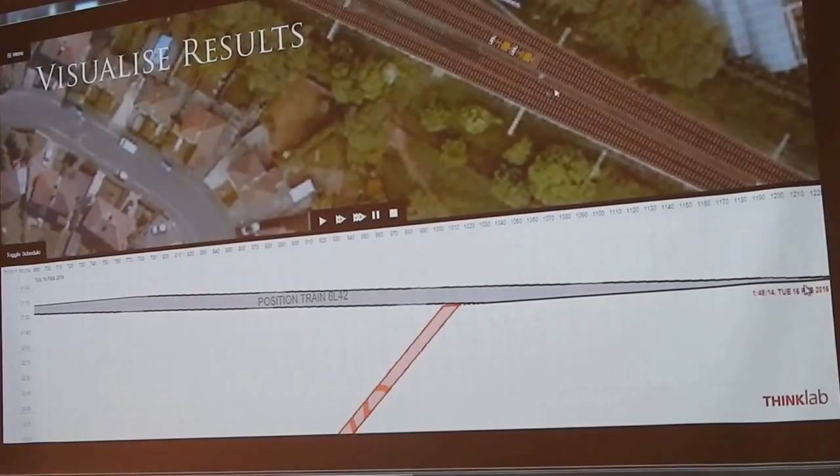This particular red line is something you can drag and go into the area of interest. This is the second task really happening. Visually it's taking the rails from the position. You can speed it up, and then you can see that the tracks are being removed.

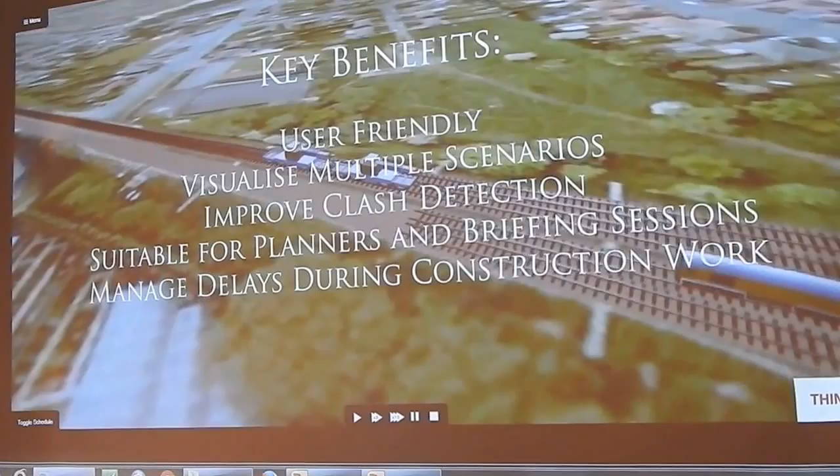So you can immediately, if there's a change in the planning, just go there and change the type of plant or something. You can see that straight away. Even during construction, it could be adapted based on the changes you experience on site.

So what we did was, this was shown to Network Rail, done with some of the colleagues in Network Rail, and it took a lot of interest. So in order to calculate this, they brought a team of people from the S&C South Alliance, and asked two young people to be introduced to the system within about 30 minutes, and then asked us to do a real project called Courthill South. So this is about how easy it is to use in terms of training.

So I'm going to, because of time, move on a little bit.

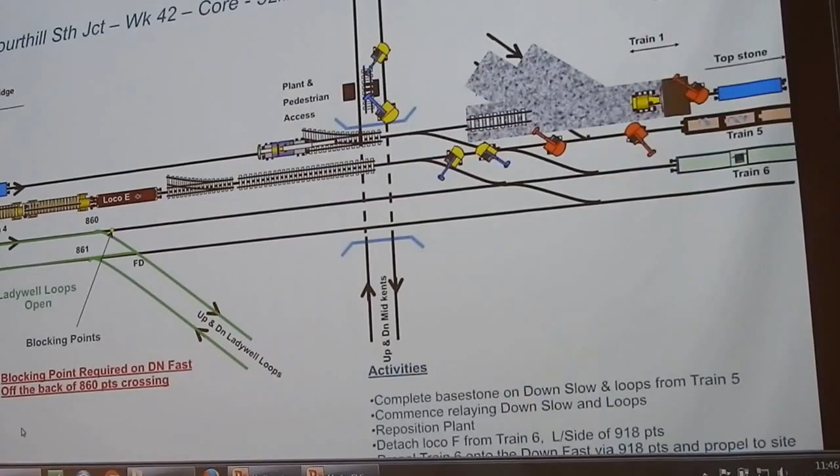Deliver more for less as part of the railway upgrade plan. In track renewals, this is what we need to do. We've used in the past PowerPoint staging diagrams that show you a sketch of how we're going to complete millions of pounds worth of infrastructure changes to the minute. We have used 4D modelling that shows you a video of what this will look like. But what we need to do is what we have here.

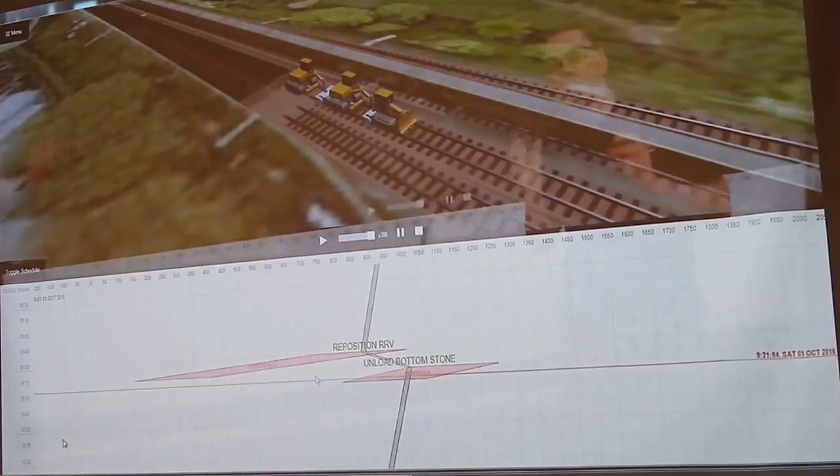This is different. This is a 4D planning package that allows us to plan in that 3D environment, to actually construct the way that we are going to build this with all the logistical and dimensional constraints that we have on site. This is different. So we wanted to see how different it was.

We gave this tool to some of our planners, and this is what they produced in 4 hours. Here, you can see them putting our actual plan into the system, checking it in the system, and then this is what it looks like. Imagine sitting down with the groups and showing this is how we're going to build it.

And here's the other variant that we did as well. You can see the plan, and you can see how it works. This gives us confidence. This is a planning package for now that will take us into the future.

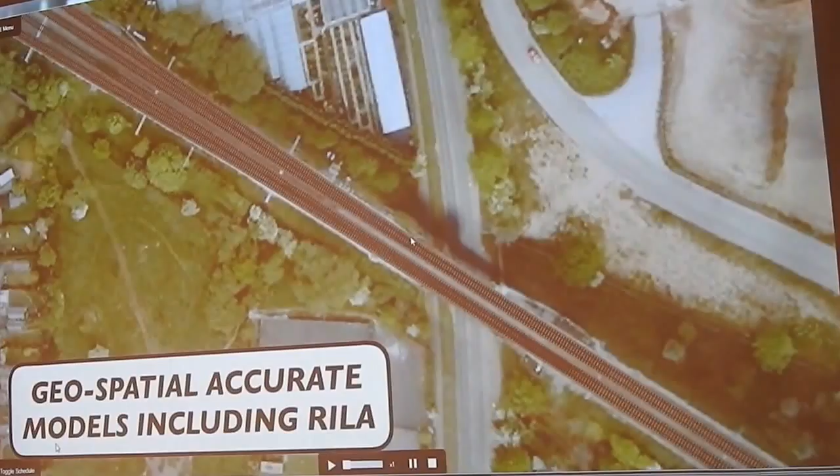Today we've come up to University of Salford to work on the package that University of Salford and Network Rail have been developing, and we've used it to plan Courthill South, which is a job the S&C Alliance will deliver in week 42, 2017.

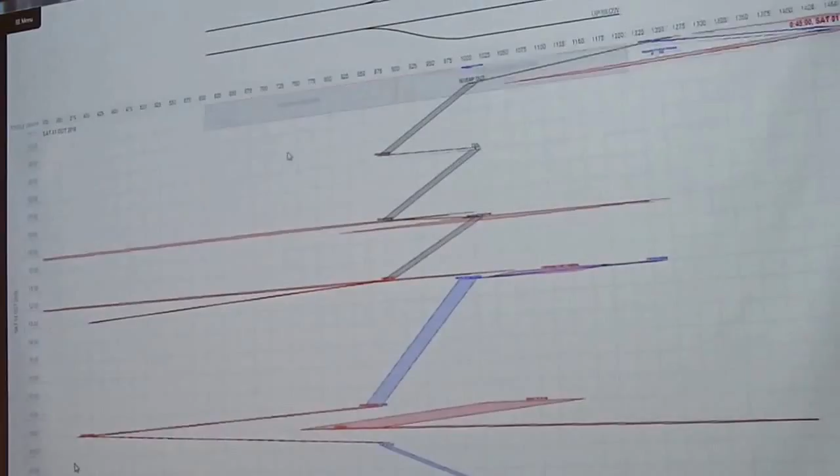Generally, when we develop a job, it takes about a week using Microsoft Project and PowerPoint. Today, considering that we've never used the software before, we've been able to do half a core weekend in 4 hours. We see this tool being used as a planning tool right through 2 years out, planning a job, through to delivery, and we see it as the base delivery and the key tool as well.

I think as this program evolves, we're going to be able to do things like track changes, which can add to our health and safety files, our risk registers, help comply with CDM regulations. The possibilities of this program are just unlimited.

For example, at Reading, there was 5 pieces of equipment inside about 100 yards of track. Basically, it just didn't fit. With this package, we can show crews straight away that 2 to 3 pieces of equipment is more efficient to do this job. My initial thoughts on it was it would be good for massive projects, but I can actually see the benefit of using it on the small weekend renewals.

So that's the 4D planning package that Salford have developed here with Network Rail. And this is just the start. These guys have just done this in a few hours. Imagine what we could do if we tracked this for a whole year. This is the start of real planning, the future to deliver more.

So currently this is going to be used initially in about maybe 10 projects across the UK. We're also observing or collecting additional things. For example, if you imagine you want to think about the disruptions to the neighborhood, so you can do noise pollution, for example. Could we think about the pollution source, so that you can make sure that as the plants are moving, the safety aspect is not compromised. And also you can think about the networks, so that you can bring in the lighting aspect.